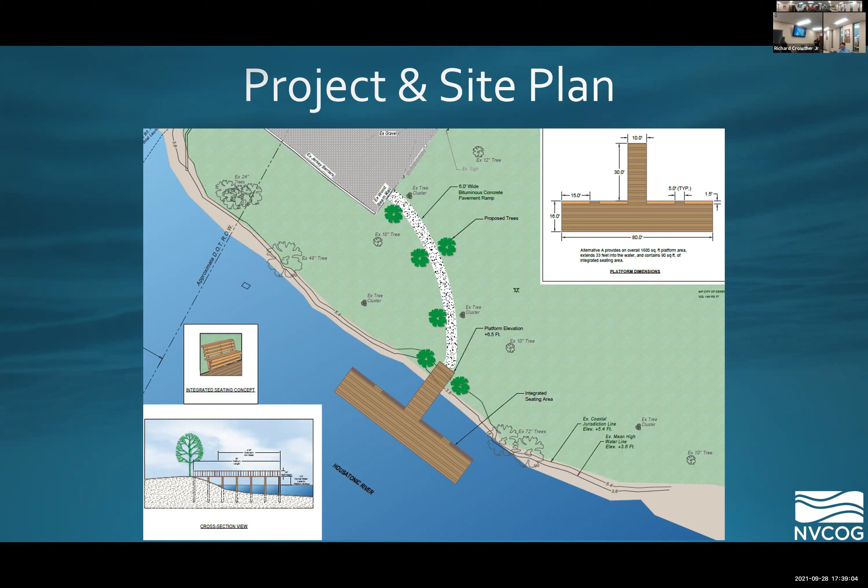Next slide please. Here we can see a quick overview of what the fishing pier is going to look like, as well as a quick Google Maps view of the overview.

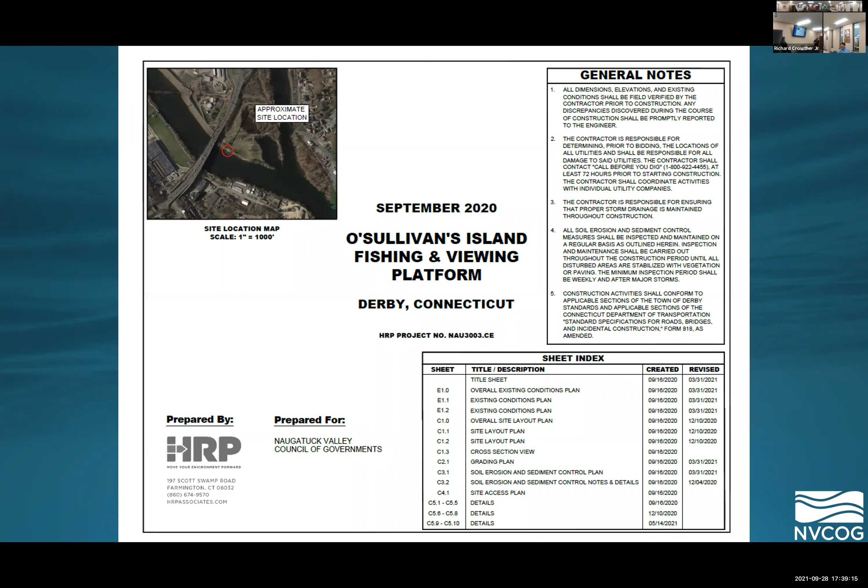Here is a better overview of the specs of the fishing pier.

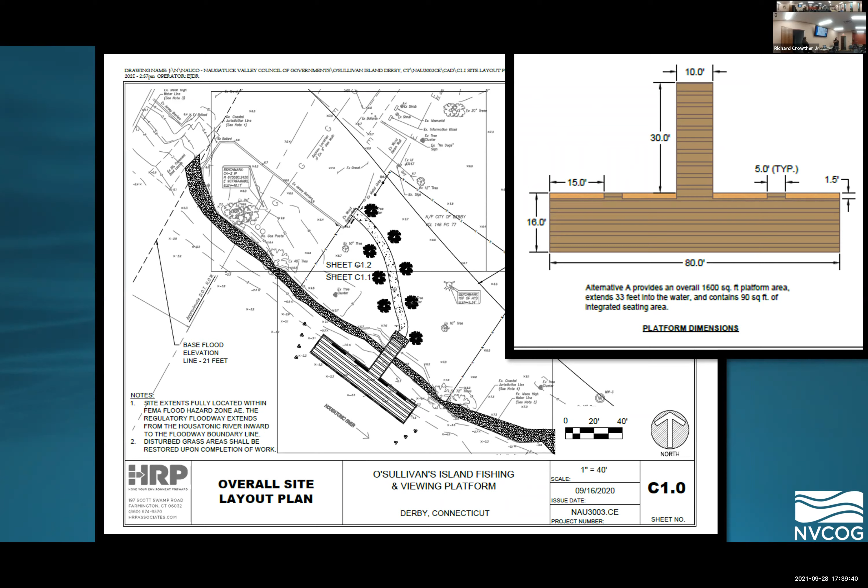Next slide please. This is a quick overview of how it's going to look from a side view of the fishing pier.

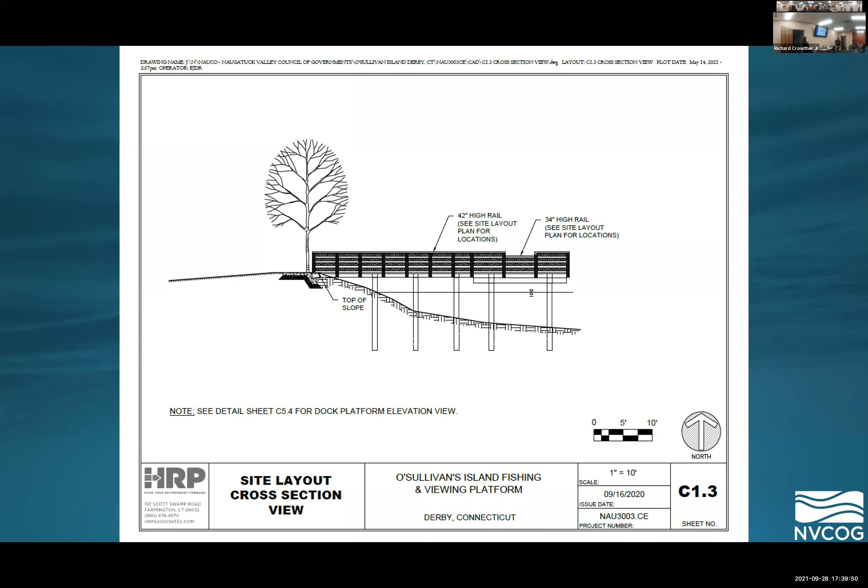Next slide. This is with everyone's, the public's input. This is the final product of what the fishing pier is ultimately going to look like.

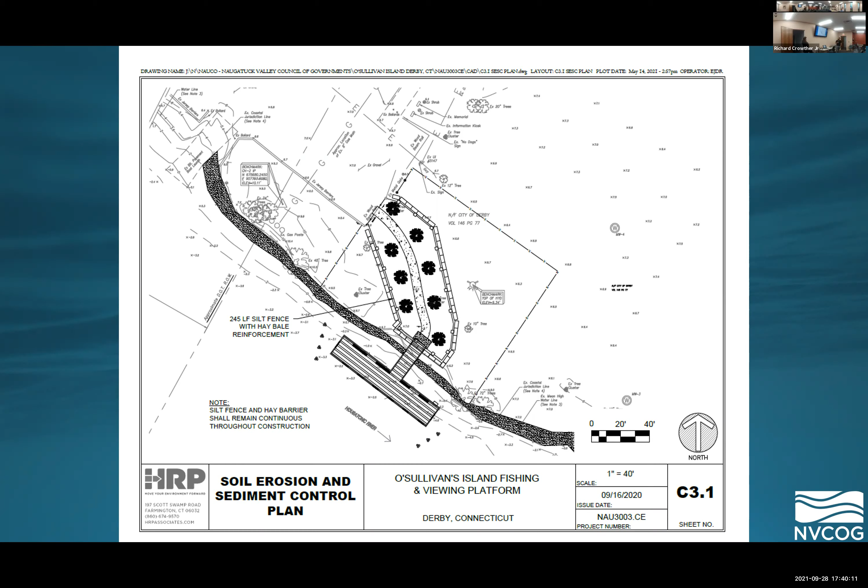Next slide please. This is an overview, looking from the top down.

Okay, thanks Ricardo. So I'm just going to go over some of the particular questions that you may have had in mind in coming to this session, or people who are watching afterwards.

So, who can use the fishing pier? This will be owned by the city of Derby, so it is a public pier. Anyone can use it as a viewing platform. However, to fish, of course, you need a license. Just a note, the pier is ADA compliant, so people of all ability levels are able to use this pier.

Next, please. So can the pier be used for non-fishing recreation? Certainly for viewing, you are welcome to use it, but swimming where people are fishing might get pretty messy, so that's probably going to be a no. And in terms of using it as a kayak launch or something like that, that's not what the pier is designed for. It's really just for fishing and viewing.

Next, please. So will parking be available? The image up here shows a view looking over from Route 8, from Google Maps.

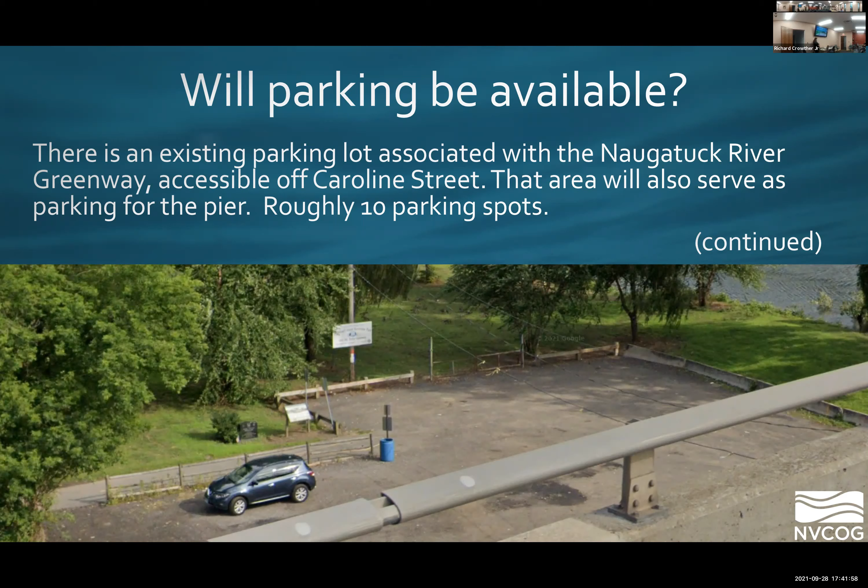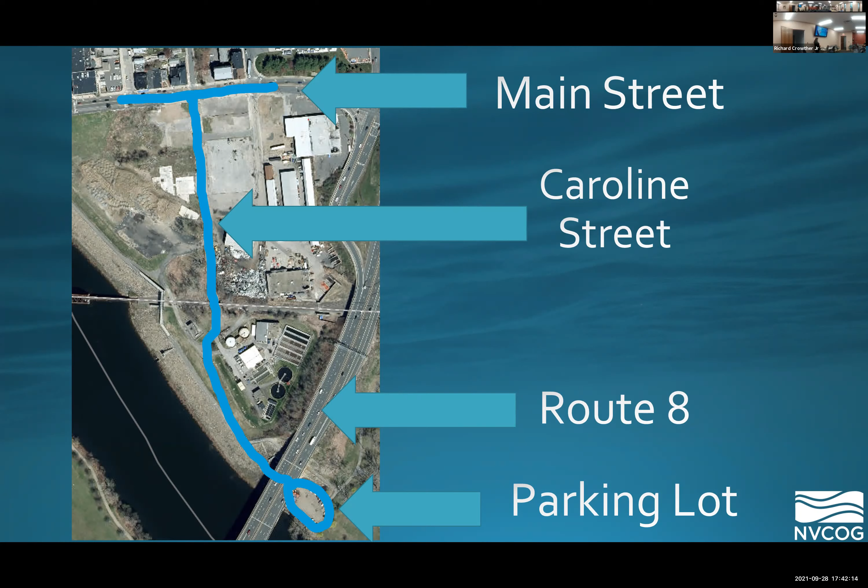If Rich could go to the next slide, just to demonstrate how to get here. We are right up there. If you turn off Main Street and follow all the way down Caroline Street, you'll go under Route 8, and that's where the parking lot is.

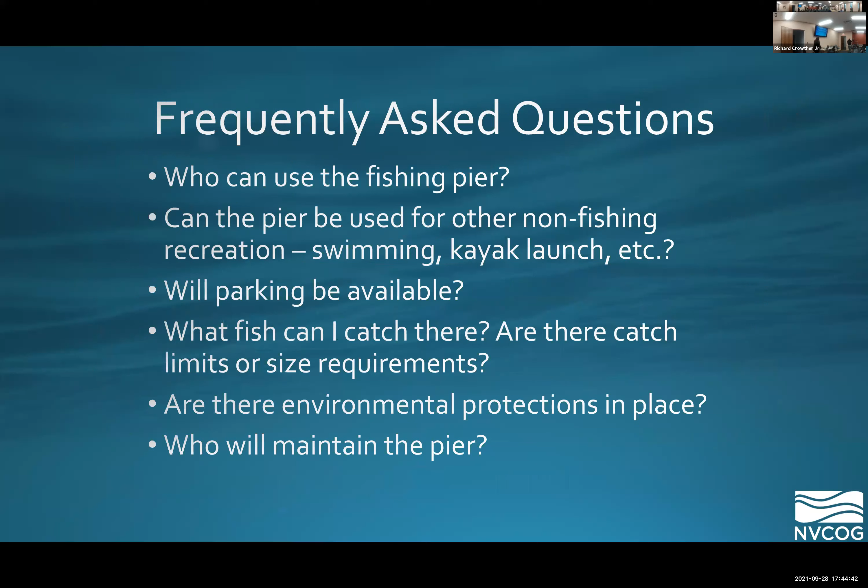Jack, please. Yeah, what's the pier made of? Is it aluminum or what? Actually, if you can go back, Rich, it's galvanized. Yeah, I'm sorry, the pier is a wooden structure, but there's galvanized steel poles that are going in with concrete footings. Yep, one more.

So pressure treated decking, lumber supply. Call Randy Kelly at Koppers.

What kind of signage is there going to be? He will be providing the signage that's going to be presented at the site. So it's going to be catch pickup - there's going to be a catch limit as well as an advisory.

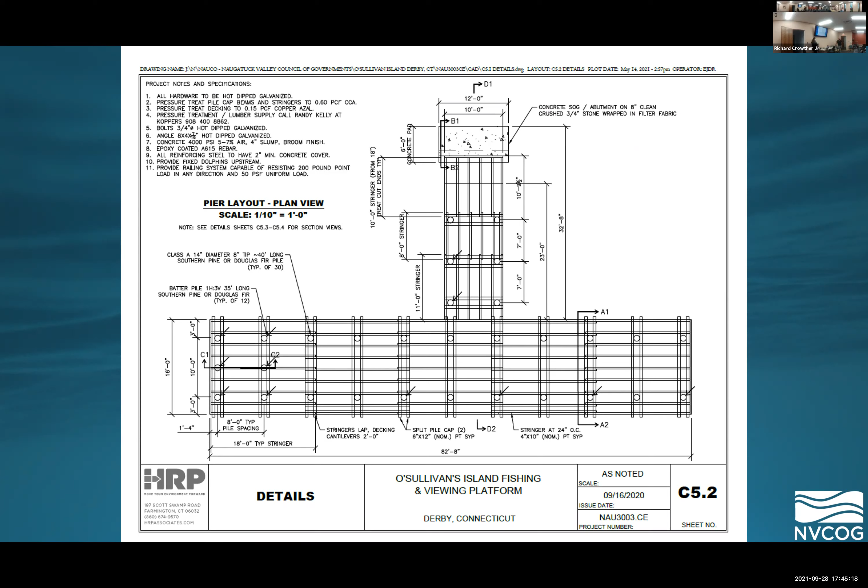Will it be on the pier or in the parking lot? That's on the signboard, I believe. So if you actually go to the next one, there's going to be a sign that's right when you come off of the parking lot and go down the path towards the pier. I believe that's where that sign with the plexiglass is going to be posted.

The Duffy's question: who's going to keep updating it? Well, I'm thinking more about the parking lot.

The parking lot's a disaster currently. I go there every day - it's not maintained, full of ruts, none of it is marked, and there's a lot more parking spaces than 10 there. I don't even know how they figured out there were 10. I think it's because people park all over the place - there's no rhyme or reason to it.

I believe what we'll be doing - don't quote me on this - is striping the spots designated for this access on the edge. Rick and I have talked about this offline as well, because as we all know, the ramp over there is owned by the state, and the underpass area is owned by the state. So I think we're going to try to bifurcate this parking, which will be further to the east, toward the point in that picture you showed. And I'm sure once we have major use like this down there, DPW will actively maintain it and fill in whatever gaps there are to make sure the parking is sufficient.

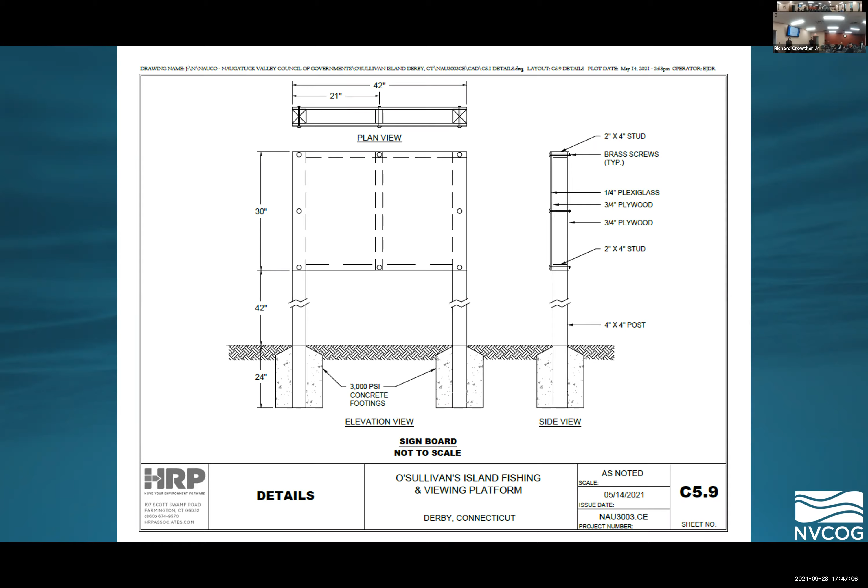If there's not any other questions, I think we will conclude. Could you go to the last slide, just so it's recorded? It has my contact information - if anyone's watching this later, feel free to send me an email or give me a call.

The timeframe - that was on the other slide. We anticipate going out to bid for construction in early fall of this year, and the plan is to select a contractor, working with HRP, the city, and ourselves at the COG.

We can get started - we can start on the outside. So we're talking about completing that, and we need to meet with Fish and Wildlife and let them know where we can fit in and start construction. We have to be very cautious - we don't want to disrupt the fish spawning grounds.

So we're talking about completion by end of next summer? I think it would be hard to commit to a completion date since we don't even have the contractor yet. But I'll say this - it's not a super robust construction project, true, once you get into the waterway. But we may be able to do some on-land work prior to that April date, and then commence some of the in-water work after that June date - that might be reasonable depending on the contractor and their schedule.